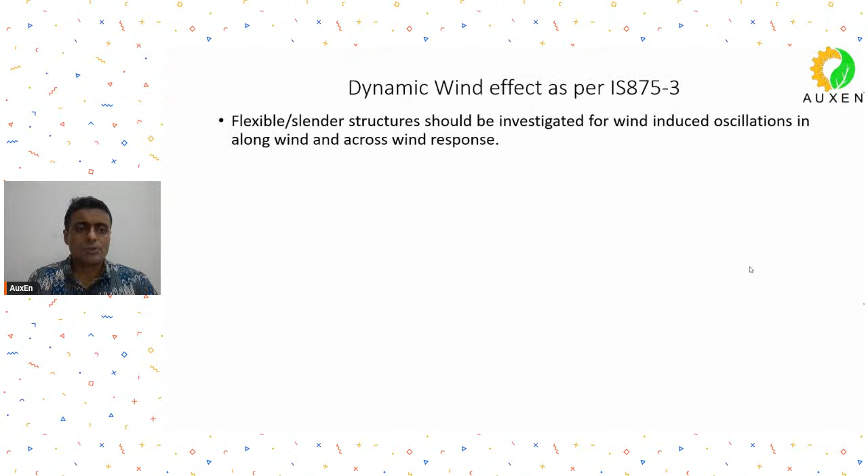So when are these dynamic wind effects to be considered? IS 875 part 3 tells us that if your building's height to minimum lateral dimension ratio is about 5 - it doesn't say exceeds, it says about 5, meaning even 4.5 or 4.3 or 4.6 qualifies - this is left to the discretion of the structural engineer to decide whether even a 4.5 ratio qualifies for dynamic wind effect calculation or not.

So if your height to minimum lateral dimension is about 5, or the fundamental mode of vibration is less than 1 hertz - meaning your time period will be more than 1 second - if either of these criteria is satisfied, then your building should be checked for dynamic wind effects. What are the dynamic wind effects we have to consider? Let us see.

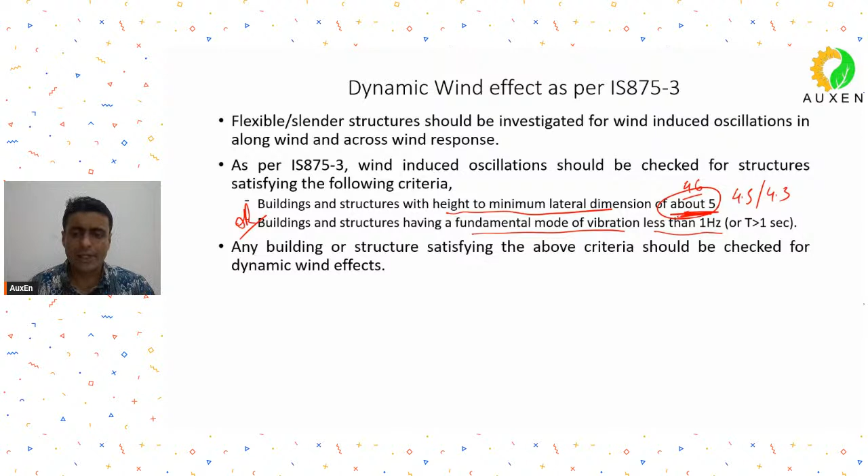I was asking who has used the dynamic wind effects in their projects. Mr. Mohammad Danish says he has used it in one of the RCC high-rise buildings he did. Anyone else in the audience who has used these dynamic wind effects? Mr. Partha has used it as per the British standard. Very nice, let us move ahead.

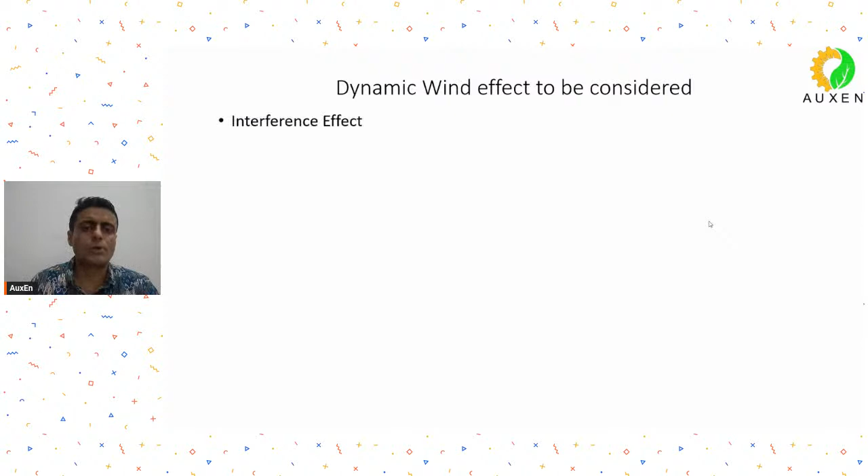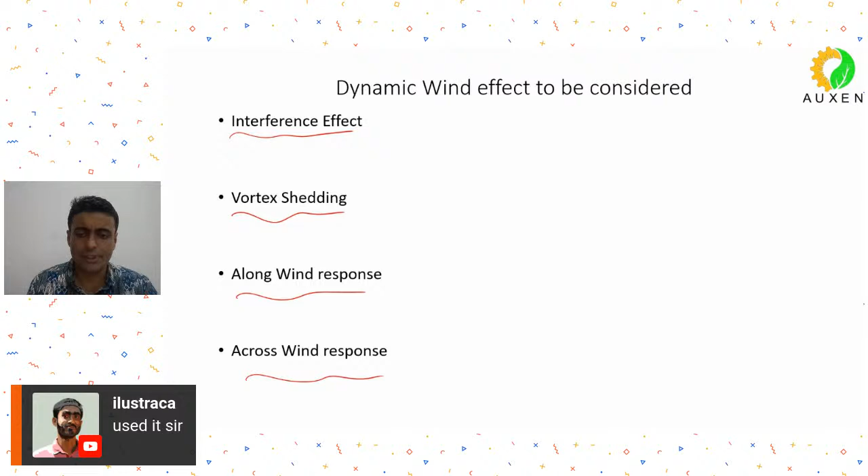The dynamic wind effects, according to the code, list out four types: first is the interference effect, vortex shedding, the along wind response, and the across wind response. One by one, let us see what these mean. Mr. Sandeep has also used it - I mentioned his name at the start of the episode because I saw some of his videos on YouTube for dynamic wind calculations, and the Excel sheet he shared was really helpful for understanding. So these are the four effects we should consider.

What is the interference effect? So the first effect that the code lists out, I think in section 8 of IS 875 part 3, is the interference effect. So what does it mean?

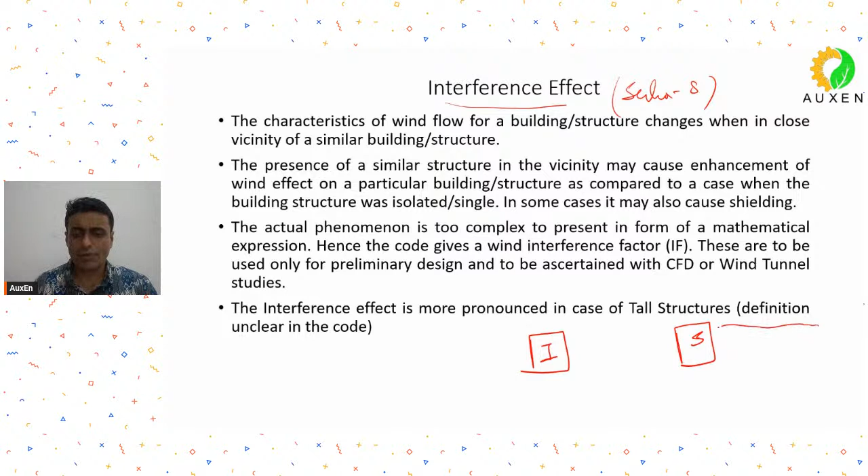Suppose this is your building. If this was an isolated building, the behavior of this building would have been different. But let us say there is a second building in the vicinity. Then if your wind currents are flowing and there is a second building in the vicinity, the effect of this other building may induce some additional responses on your primary structure.

To put it in other words, let's say you are going to construct a structure in the vicinity of a pre-existing structure. This is your new structure, this is your old structure. So what may happen is, because of the presence of the old structure, the wind currents may undergo some interference, and the wind forces that this new building will experience would be slightly different than what would have been if this building was an isolated standalone building. So this is what they are trying to tell you in this interference effect.

So the presence of a similar structure in the vicinity may cause an enhancement of wind effect on a particular building or structure as compared to the case when it was isolated or single. The actual phenomena is too complex to calculate, or it is too complex to have any numerical mathematical expression for it.

So therefore the code gives you an interference factor. You should use this factor only for preliminary design, and it should be ascertained with either a CFD analysis, computational fluid dynamic analysis, or wind tunnel testing to find the exact value of this interference effect.

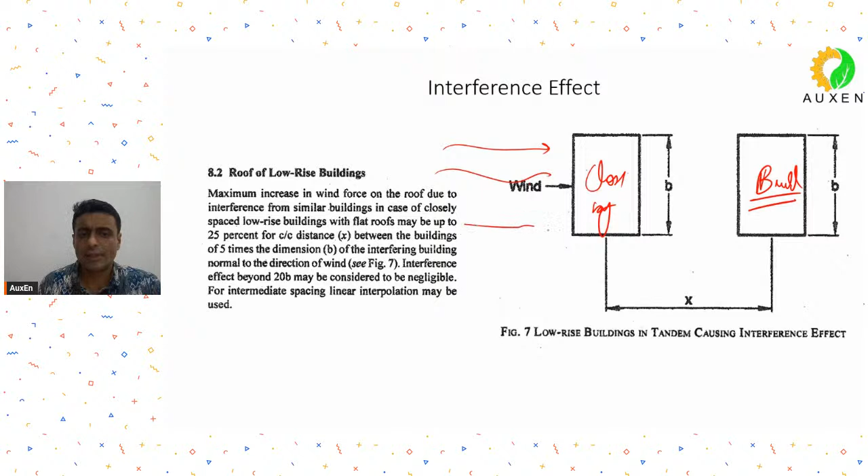So this is the codal provision. For low rise buildings, it says suppose this is your building under consideration, the building you are designing, and this is a close by building. So if the wind currents are blowing like this, and if there is an existing structure at a distance x, and x distance they write as 5 times b. So if there is a building at a distance of 5 times b or less, you have to increase the wind interference factor on this building.

That means if this building was isolated, as a standalone building, compared to that, for this building now which has another building close by, you need to increase the wind loads by a factor of 1.25. So this is what the code tells you for low rise structures.

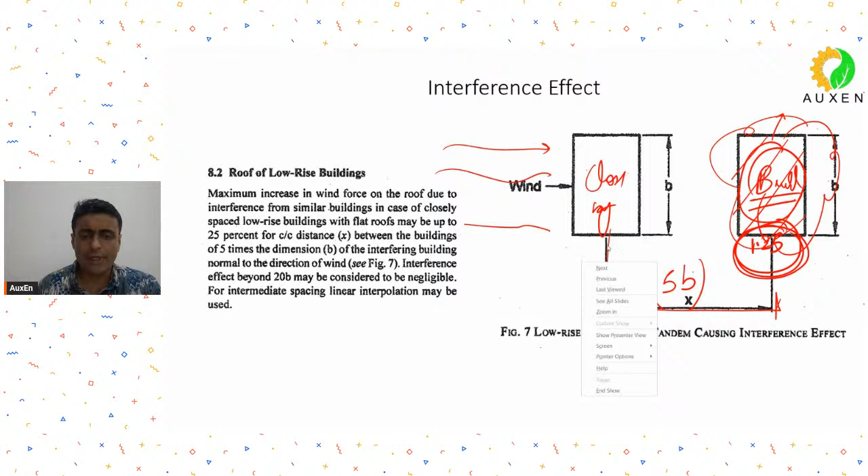If the nearby building was more than 20 times the width away, then you need not consider any interference effect. So that is what the code tells you.

Now there might be a question: let's say while constructing there was no building in the vicinity, but after construction a new building came up close to the existing building. Then even the wind currents on the existing building will undergo a change, isn't it? Suppose while constructing there was only this building and you did your wind load calculation as a standalone building, and after a few years a new building got constructed close by. Now the wind loads or wind currents on your building will undergo changes.

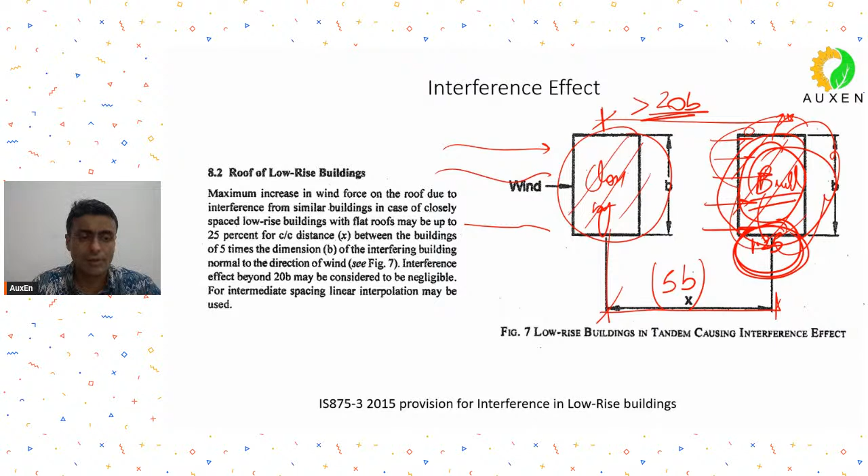So in such cases, you have to anticipate as a structural engineer the possibility of future constructions, and accordingly you will have to consider the wind loads and anticipate the possible interference.

Then you have got another criteria for tall buildings given in 8.3. Here it says if this is your building under consideration, and suppose there was an existing building in the vicinity, it has given you certain zones - you can see Z2, Z3, Z4 and so on. So if this building was, let us say, A, B, C and D, suppose you have a building in this zone, suppose you have this building B.

Okay, so what interference will it have on your original building O? For that you have to check this zone. This zone is Z1. So presence of this building B in zone Z1, you will have to consider an interference factor of 1.35 on your original building. That means you have to multiply your wind loads by a factor of 1.35. Is that clear?

Suppose your building was this building C. This is in zone Z2. So presence of this building C in zone Z2 will mean that on your original building, you will have to multiply the wind loads by a factor of 1.25. And likewise for other zones also. So this is how this interference zone diagram is given to you.

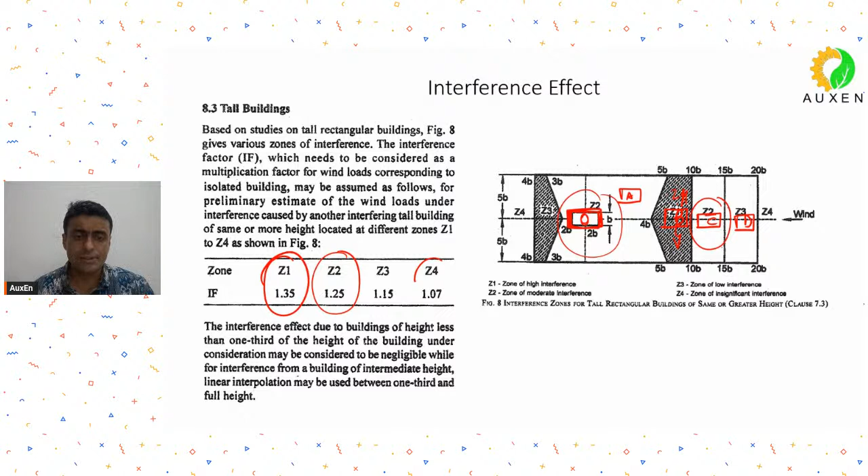When do you have to consider the interference of a nearby building? When its height is equal to the height of the original building, and up to one third of height of the original building. If the height of interfering building is less than one third of the original height, then you do not consider any interference effect. For intermediate heights, you can interpolate these interference factors. So this is how you have to consider the interference effects.

So this was the first dynamic effect given in IS 875 part 3. The next dynamic effect is vortex shedding. What happens in vortex shedding? Your wind currents, when they encounter a sharp, blunt object, disperse near the edges. When they disperse near the edges, alternating vortices are formed. Because of this vortex formation, even though the individual vortices are not large, since it is a vortex formation in an organized pattern, it leads to across wind force on your structure. So this also is a problem.

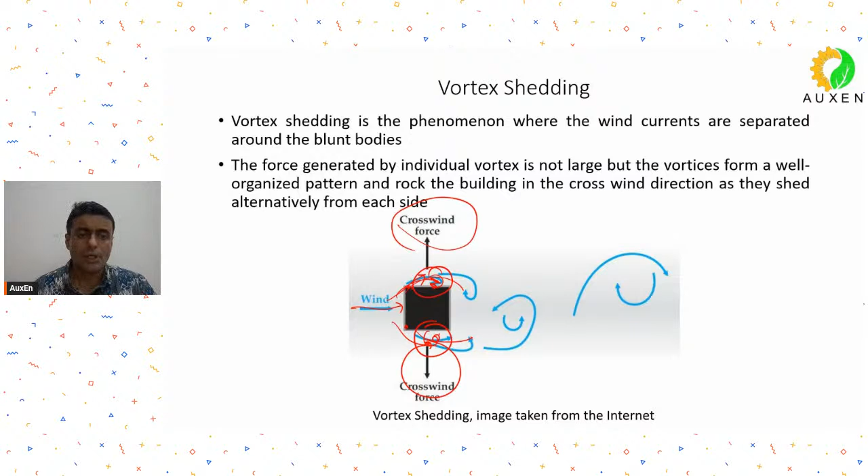Vortex shedding might be a problem for tall slender structures. What does your code tell you? That this is of special significance in tall structures, and it may lead to significant across wind responses. When will it lead to significant across wind responses? When the frequency of vortex shedding matches with the fundamental natural frequency of the structure. Then there will be a situation like resonance - it will be a resonant frequency, and that will lead to significant across wind motions. If such a thing happens, the code tells you to refer some specialist literature in such scenarios.

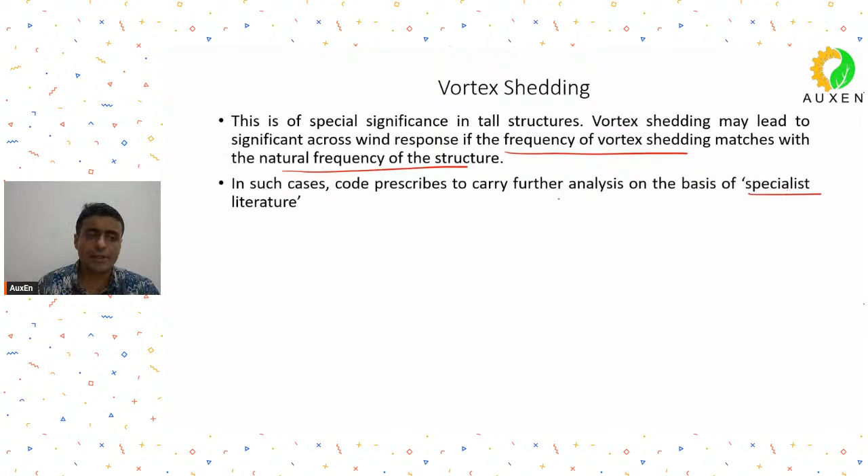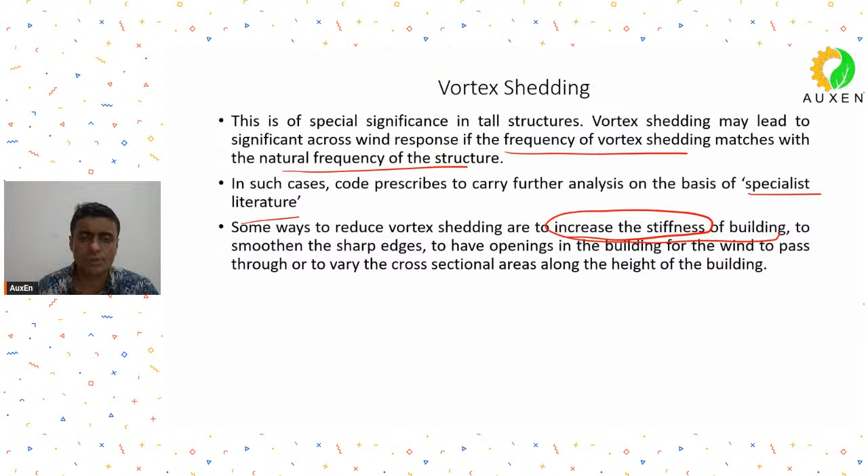This is true for very tall buildings. If your building is very tall, you adopt some strategies to reduce this vortex shedding. How do you do it? Either you increase the stiffness of the building, but increasing the stiffness is tricky because then it will attract more earthquake forces also. And for super tall buildings, you cannot go on increasing the stiffness beyond a point.

The other thing is that you can smoothen the sharp edges. So if your building plan is like this, perhaps you can make it smooth like this. Any building cross section that resembles this plan, where the edges have been smoothened out instead of providing sharp edges - can you recall any tall building where they have smoothened the sharp edges? If you have heard about Taipei 101 - in Taipei 101, the plan of the building initially was having sharp edges, but then to reduce the vortex shedding effects, they reconfigured the plan and smoothened the corners, with concave edges like this. So this is one of the strategies to smoothen the sharp edges.

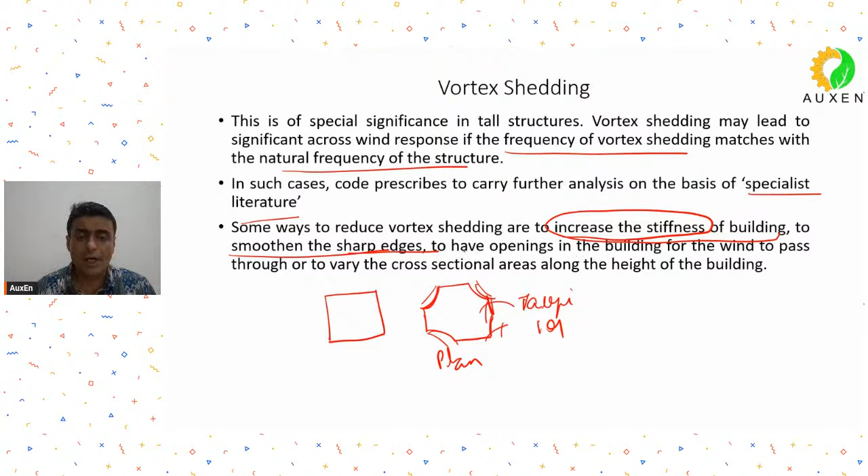The other strategy can be to have large openings in the elevation. So instead of having a straight elevation like this, you may introduce an opening like this in the elevation itself. I think there are some buildings in China, Shanghai, or Dubai, where they have introduced large openings in the elevation of the building to reduce the vortex shedding.

The third strategy can be to vary the cross sectional area of your building. So along the height, you don't have a uniform cross sectional area throughout. You try to introduce or vary the cross sectional areas in elevation, so as you move up, you will see different cross sectional areas at different heights.

So where do you see such a strategy being used? Having different cross-sectional areas along the height of the structure. If you've heard of Sears Tower in Chicago, it uses this strategy, or Burj Khalifa uses this strategy. Both of them have varying cross-sectional areas along the height. So these are some of the few strategies you can reuse in super tall structures if you want to reduce the vortex shedding.

What does the code tell us? The code tells us that you calculate the frequency of vortex shedding. This is the formula, and if it matches with the fundamental structural frequency, then your structure has a tendency to undergo vortex shedding, and it may then be properly analyzed with the help of specialist literature.

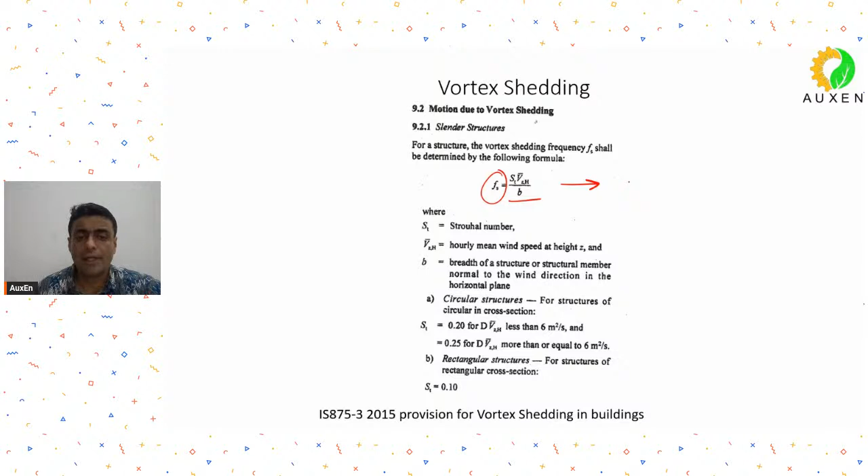So how do we find out this value? Let us see. Here they give a formula to calculate the frequency. Let me take a quick example: say your building has a plan of 18 meters by 27 meters, and this is the wind direction. So your B is 18.

ST is called the Strouhal number. I don't know whether this pronunciation is correct, but just like you have Reynolds number in fluid dynamics, similarly this person has done a lot of work in the field of wind and fluid in general, so it's a number named after him. For general structures, you can take this value as 0.1.

Let's say the hourly mean wind speed at height - I'm just taking a random value - let's say it was 40 meters per second. This is after the introduction of K1, K2, K3, everything. And the width is 18.

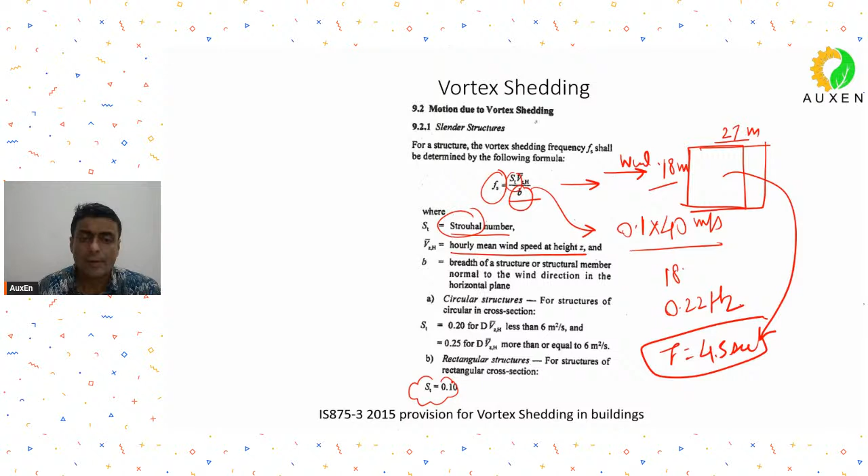So what frequency do you get? If someone can calculate - the frequency you get is 0.22 hertz. So what is the time period? The time period will be 4.5 seconds. That means if this structure under consideration has a time period of 4.5 seconds, then such a structure will undergo vortex shedding, or you may say vortex shedding then becomes an important criterion to consider.

Are you getting this? So generally you'll see that normal height buildings will not have this kind of time period. Your normal G plus 15, G plus 20, even G plus 25 structures will not have this kind of time period. This type of time period will be there for, let's say, G plus 30, 35, 40 onwards. Otherwise you won't get this kind of time period for your general buildings. So what I'm trying to tell you is that for general height structures, vortex shedding is not a problem, so you may not be very worried about it.

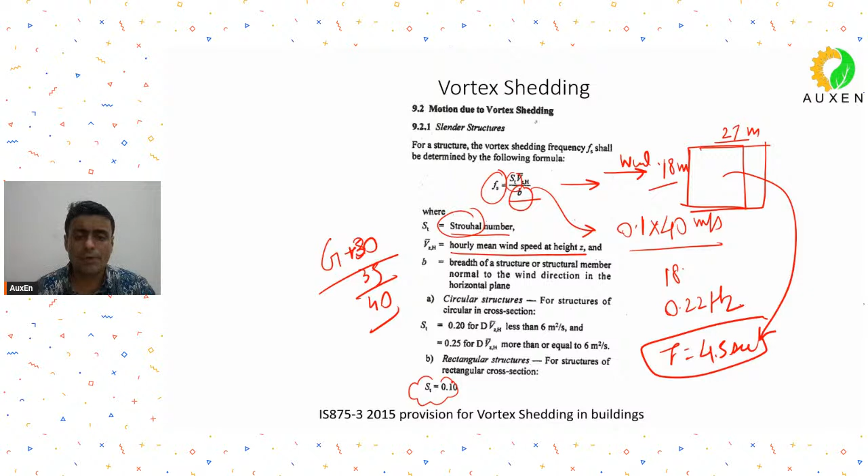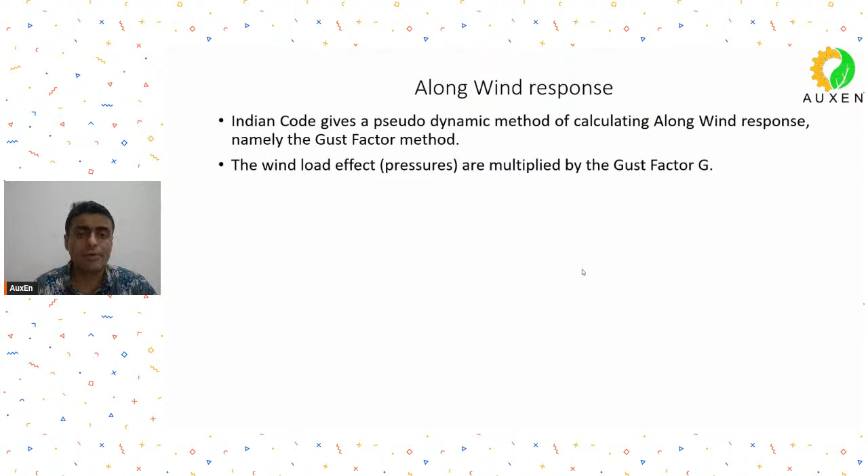So this was the second dynamic effect. The third is the along wind response. Along wind response means - this is the plan of the building, and wind is hitting from this direction. So the dynamic amplification of wind loads in this direction is called the along wind response.

So how do we calculate it? We calculate it by a method called the gust factor method. It is basically a pseudo-dynamic method because we do not calculate the wind forces on the basis of the modal behavior of the structure. We just do it on the basis of a factor, and we multiply that factor by the static wind to get the dynamic wind effect. So basically we take the dynamic wind equal to G times the static wind. It is similar to the equivalent static method, where we are not doing the actual modal analysis, we are just enhancing the value by a factor. We have a static wind, we multiply it by the gust factor to get the dynamic wind response, so therefore we call it the pseudo dynamic method.

This method, or this type of mathematical expression, was first given by a person called Davenport in the year 1967.

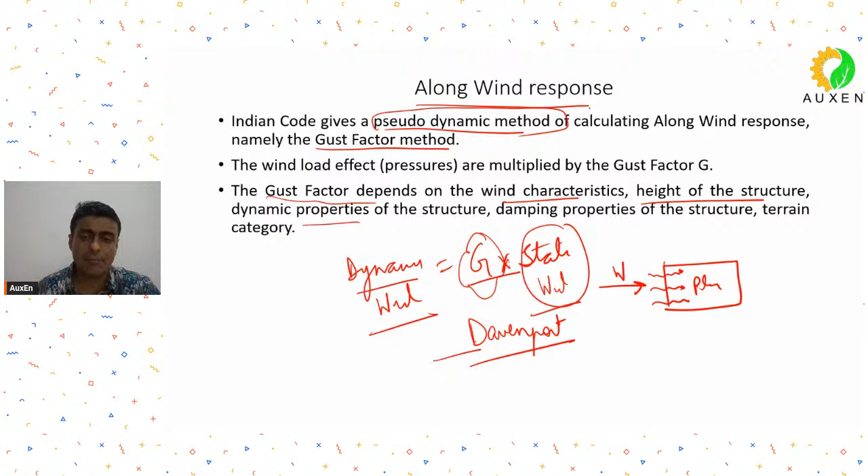I don't recall his first name, but he did a lot of work in wind engineering, and it is his method that all international codes today use as the gust factor method. The gust factor depends on wind characteristics, height of the structure, dynamic properties, time period, damping, terrain category, etc. There's a long calculation procedure given in the code, so I've taken screenshots of the code itself.

Here this is phi, not G. There's an amendment to this clause. Sorry, it is phi over here, and this is given as the gust factor. Out of this, one term is the base component of your wind currents, and this is the variable component. So you take both into account to calculate this gust factor.

There are a lot of calculations given to you. It is a step by step algorithmic approach that you have to follow, and you get this gust factor. Once you get it, you multiply the wind pressure by the wind coefficient CF, given in table number 21 of IS 875 part 3. Just like you have the external and internal pressure coefficients CP, CPI, you have these force coefficients for rectangular buildings, given in table 21 if I remember correctly. So it's this coefficient into area into pressure.

So this is the static wind speed. You multiply it by G to get the dynamic wind effect. Then you can get the overturning moments at the base, or the total deflection at the top. All those values you can get once you have these dynamic forces.

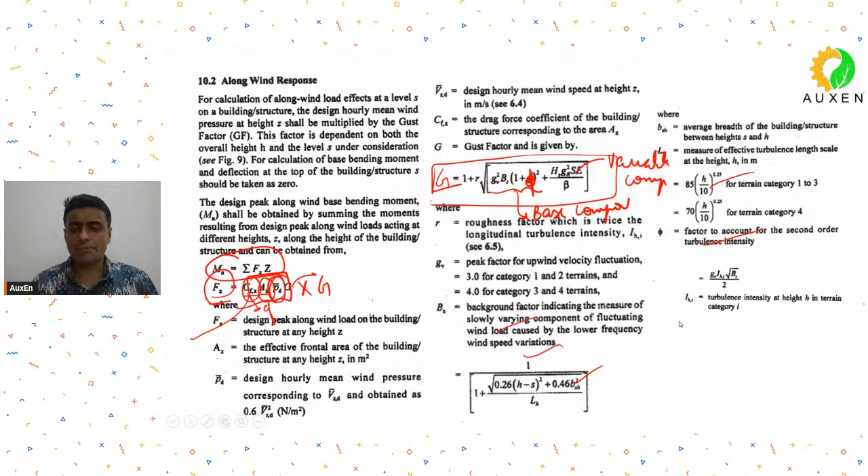So the gust factor is calculated, and there are a lot of formulae. It's formula intensive work, so it is better to prepare some Excel sheet to automate this calculation, because you can't calculate this every time manually. The formula goes on, and you calculate the gust factor.

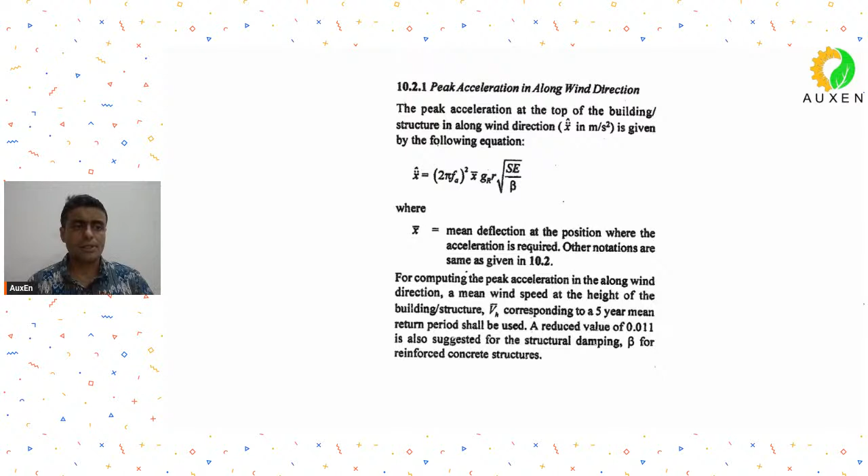Then you can also calculate the peak acceleration, which is generally required for human comfort, so sometimes you may need to calculate it. All these things can be easily done. The fourth response is the across wind response - that means wind is blowing in one direction, but the response happens in the perpendicular direction.

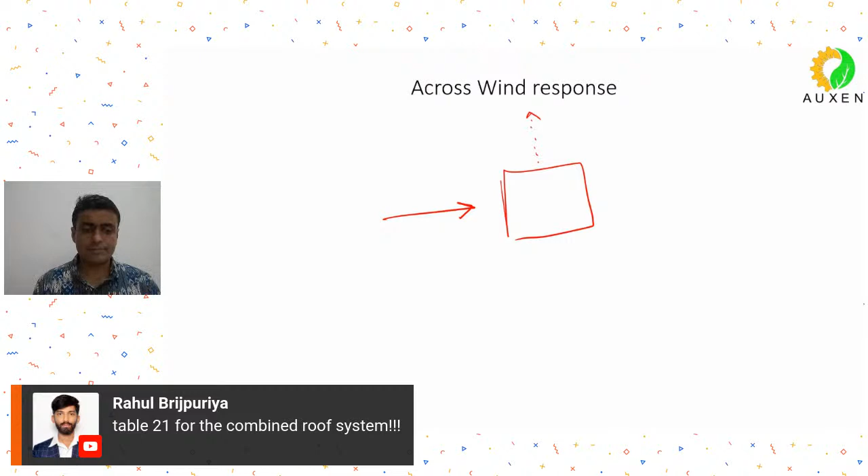Mr. Rahul is saying table 21 is for the combined roof system. Oh no, wait, which is the table for rectangular buildings? Let me search. CF table... ah, this is figure 4, not a table - figure 4, page 35. Okay, yeah, that is the one.

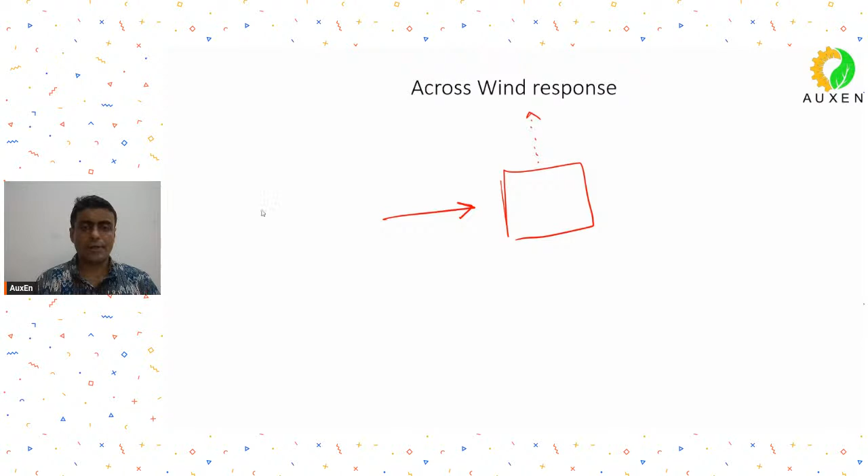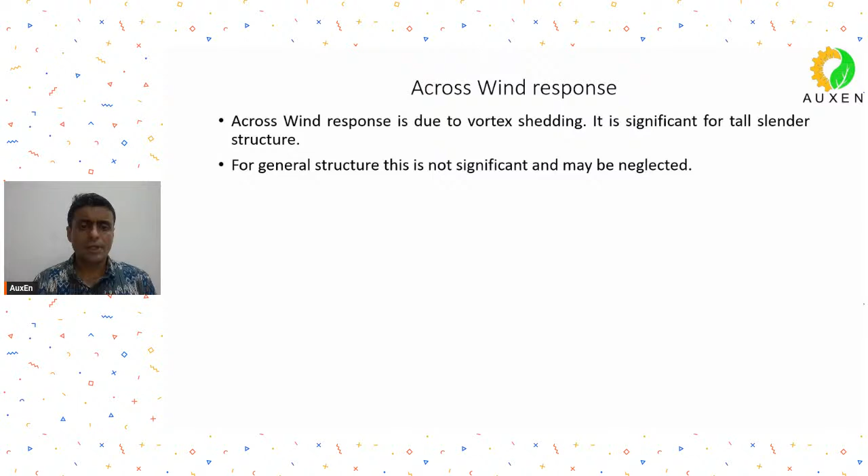So across wind response - your code tells you that across wind response due to vortex shedding is significant for tall, slender structures. For general structures, that means if it's not a tall structure but a mid-height structure, you may ignore it because it is not significant. The calculation for across wind response is given in code section 10.3.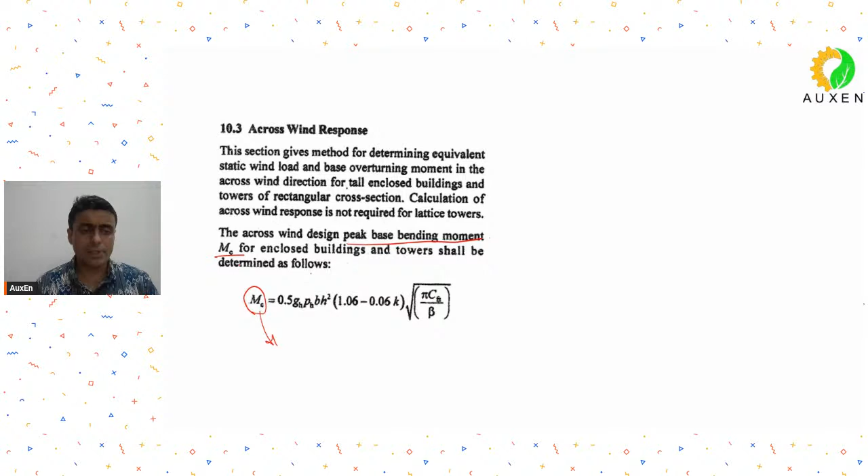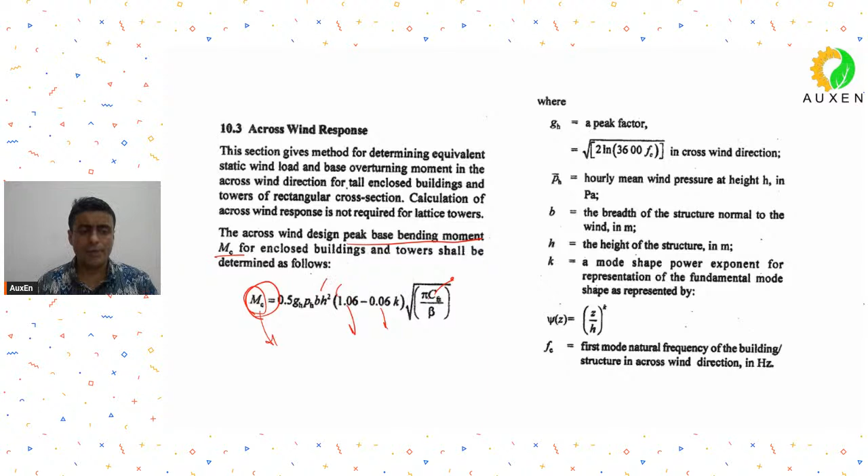In this case, it is a slightly different approach. First, you calculate the peak base bending moment - just like the total overturning moment in case of earthquake. You calculate this first. Once you have this value, all these independent terms are given in the code for how to calculate them. Once you have the overturning moment at the base, you can calculate the distribution of these forces at every level.

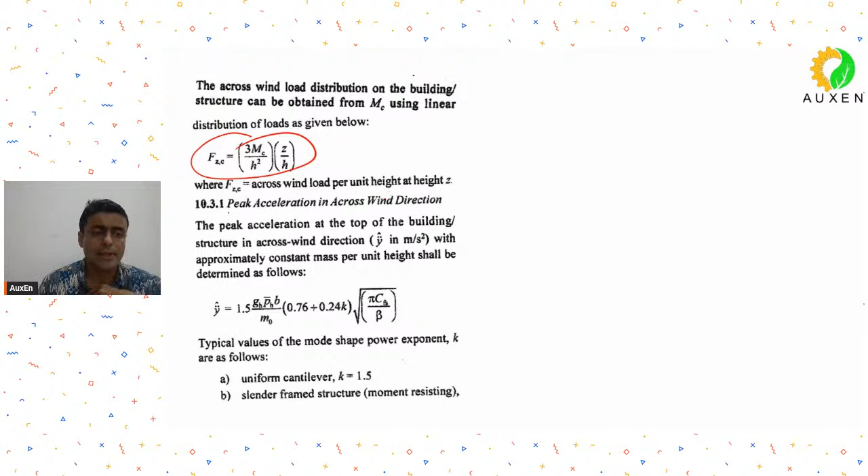So this is a slightly different way of calculating for the across wind response, and you can also work out the peak acceleration if you want. There is one term, CFS, that you see here, which you can calculate using the curves in figures 10 and 11. These figures give you the way to find out this CFS. So this is how you do the dynamic calculations.

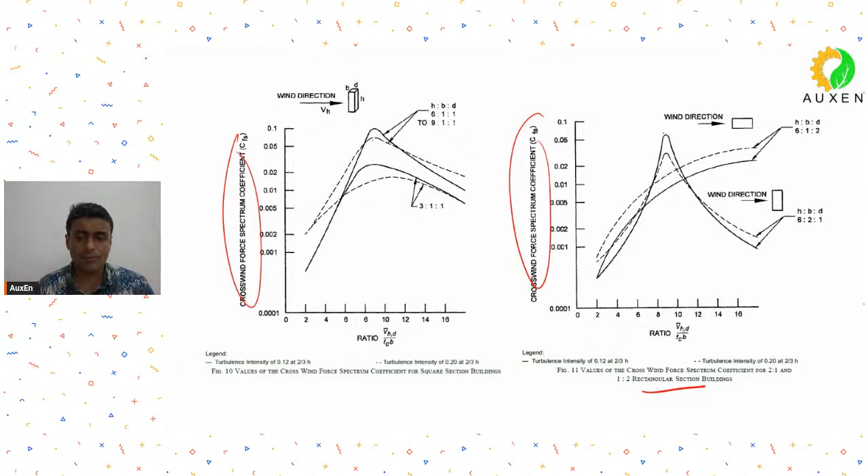Now what I have done is I wanted to discuss this using a sample model. Mr. Sandeep is asking how we can use this method when the structure is not rectangular or square, since the charts for CF are only given for such shapes. Yeah, correct - the CF charts are only given for square and rectangular structures, and even for rectangular ones, only for an aspect ratio of 1:2 or 2:1.

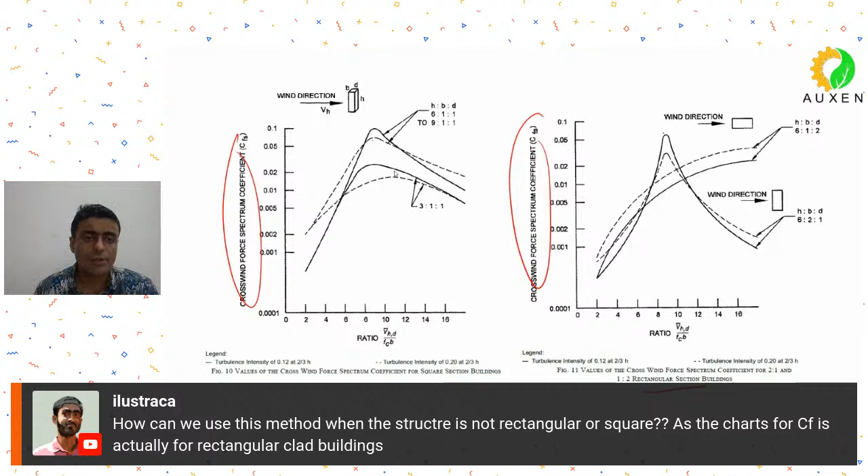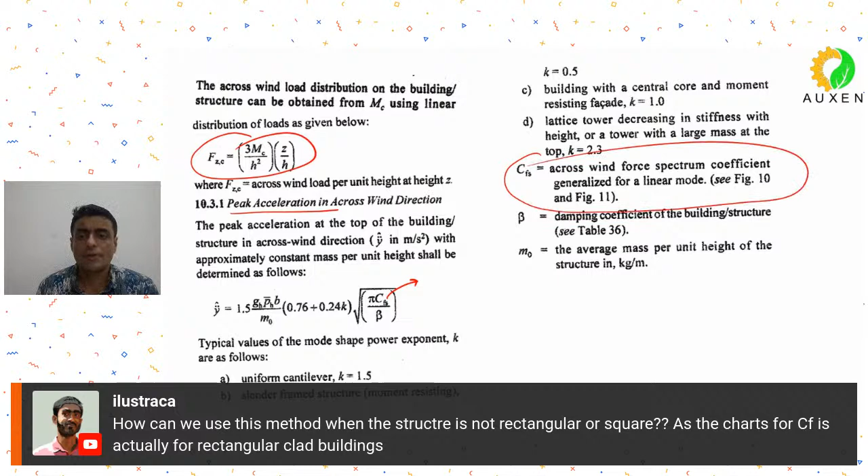So for any other randomly shaped structure, you don't have the methods and ways to calculate CFS. I don't know - you may have to go for some wind tunnel testing, or I'm not quite sure how you do it, because the code doesn't tell you anything about it. It just says CFS is the across wind force spectrum coefficient. So for a non-rectangular, non-square building, what do you do?

Mr. Sandeep is asking, do we need to assume the structure as equivalent to a rectangle? No, because the behavior entirely changes in case of wind. Suppose your structure was triangular in plan, and you assume some equivalent square. Then the behavior of this square will be totally different from that of the triangle. So I won't suggest assuming some equivalent squares or rectangles.

I would suggest you go for some wind tunnel testing or do some CFD testing - CFD analysis, computational fluid dynamic analysis.

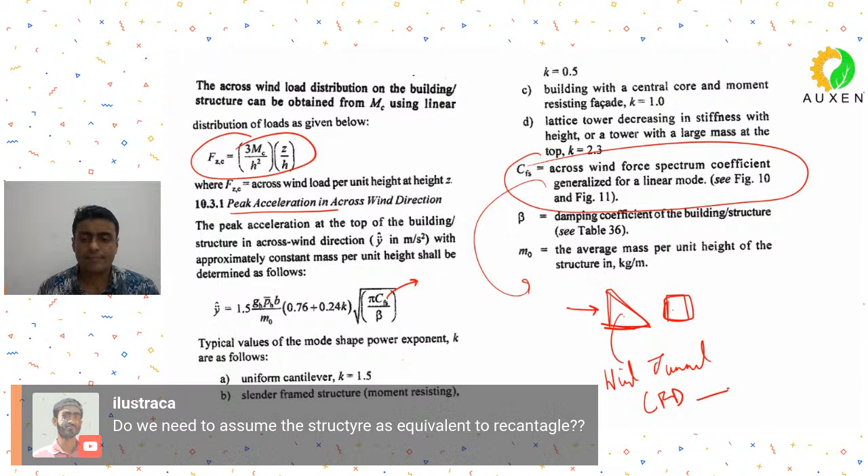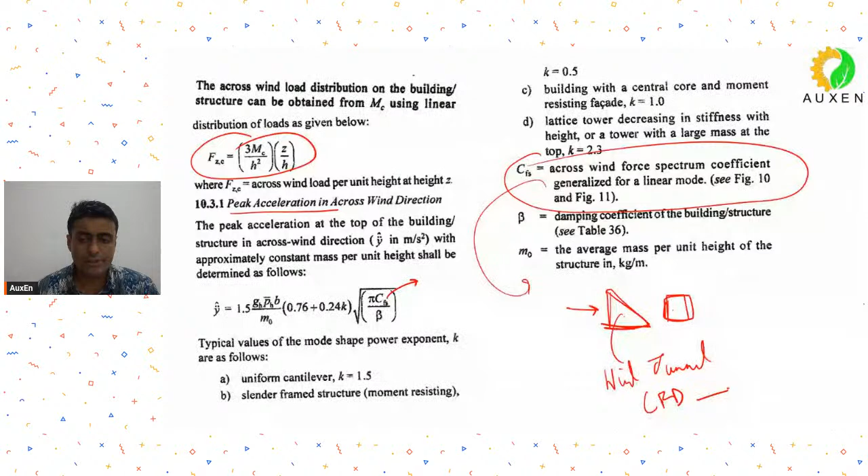So what we will do is quickly understand this in a better way. I'll share my screen. We will quickly see an ETABS model, and then try to understand what would happen if I had to calculate the dynamic wind effects for it.

Now, to understand how the dynamic wind effects will be calculated, I will mainly focus on the along wind and across wind responses, because interference we cannot predict. The code tells you to take only a preliminary value for interference. If there are other structures in the vicinity, the code always recommends you go for a CFD or wind tunnel testing. So I am not doing interference. Vortex shedding we can probably do, and we can do the along wind and across wind.

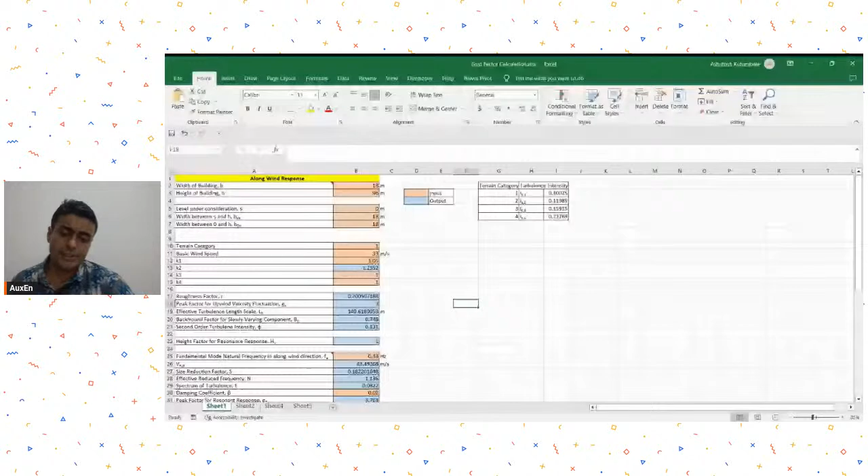Let me share - how do I share? Let me take you to our Excel sheet. In making this Excel sheet, I had asked for some help from Mr. Sandeep Dev. So this is the Excel sheet that we have tried to make - it will calculate the along wind response, and it will also calculate the across wind response.

So you have to input the height and width of the building. Right now this is my building - this is 18, this is 27, and I am considering wind in this direction, so this will become the width. So width of the building is 18, height is 96 meters. We are doing a very quick calculation just to see what sort of values we get.

This is the level under consideration - S equal to 0, because I want to take the overturning moments and tip deflection, so I will have to put the value of S as 0. Then width is this. Terrain category - let's say we are in a city center, highly densely constructed, so terrain category is 4. Let us say we are somewhere in Bangalore or Hyderabad, so basic wind speed is I think 33 over there, so let us take that.

K1 is 1.05. K2 will be calculated as per height of 96 meters, so K2 is self-calculated. This roughness factor is 2 times the turbulence intensity, which is given over here - given in section 6.5 of IS 875 part 3. This is the peak factor for upwind velocity fluctuation, GV. All these terms are properly defined in the code along with the response, so I'm not going over that.

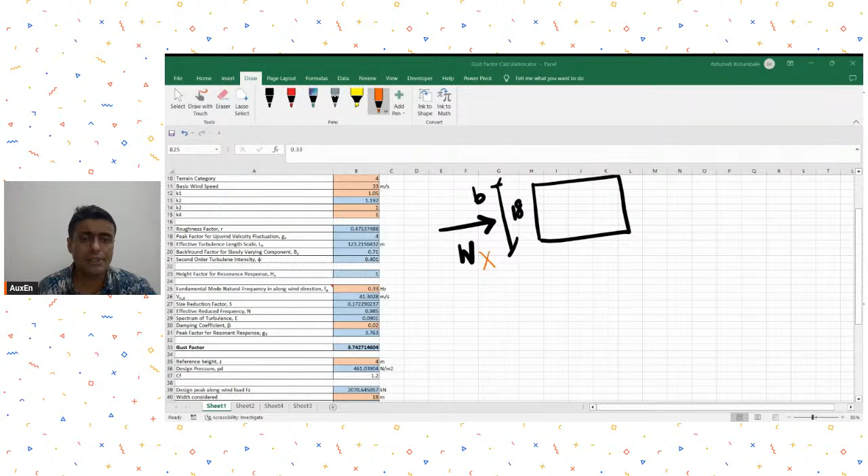You have to put the fundamental natural frequency in the along wind direction, meaning in this case I will have to put the frequency in the X direction. So I will go to ETABS and check the modal frequency. In this case, though I'm not sharing the screen, the modal frequency comes out to be - how much is it coming? - 3.27... it comes out to be 3.17 seconds. So the fundamental mode time period is 3.17 seconds, and I will put that value.

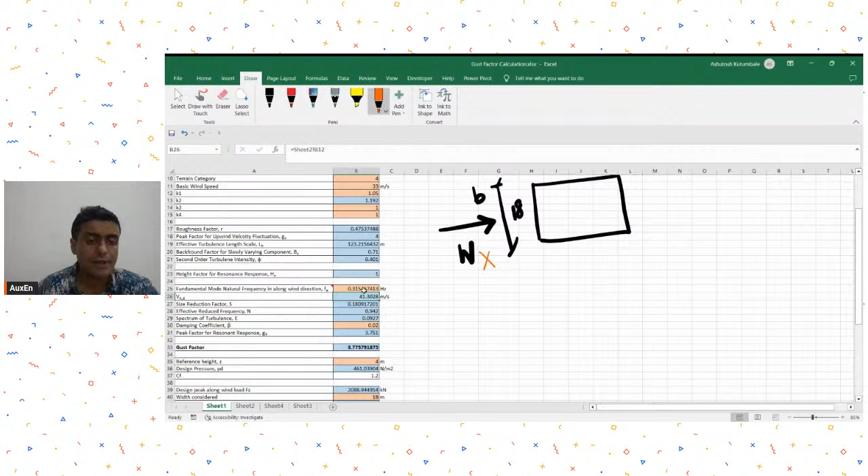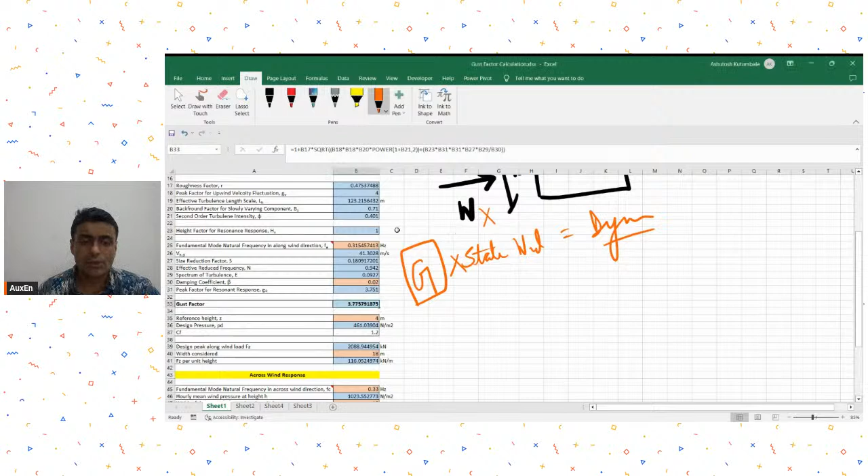So time period comes out to be 3.17 seconds, frequency will be 1 upon that, so I put that value. Then accordingly it calculates, and the gust factor comes out to 3.77. What does this gust factor of 3.77 mean? That all the static wind responses that we had calculated need to be multiplied by this gust factor - so our wind in dynamic is getting amplified by 3.77 times. Is this clear? I think it is clear. So this is how this gust factor calculation has to be done.

Now suppose at some reference height you wanted to calculate what is the total UDL acting at a particular floor level.

You can put this reference height and the CF factor from figure 4 as we had just seen. From figure 4, you put this CF factor and it gives you the wind load per unit height at a particular reference level. So at 4 meters, this is 116 kilonewton per meter wind force. To convert it into a force value, I multiply by half of the floor distance above and half of the floor distance below. Right now our floor to floor heights are 4 meters, so I multiply by 4 meters to get a value in kilonewton units. This will be the total wind load acting at a particular floor level. So in this way you can use this Excel sheet to calculate the wind loads at different floor levels.

Mr. Aakash is asking, have you applied stiffness modifiers for this model? No, not as of now. I have not used the provisions of IS 16700 for this case at least. You may ask then why still the time period is coming out to be 3.17. Because the columns were very far spaced, therefore the system is becoming quite flexible right now.

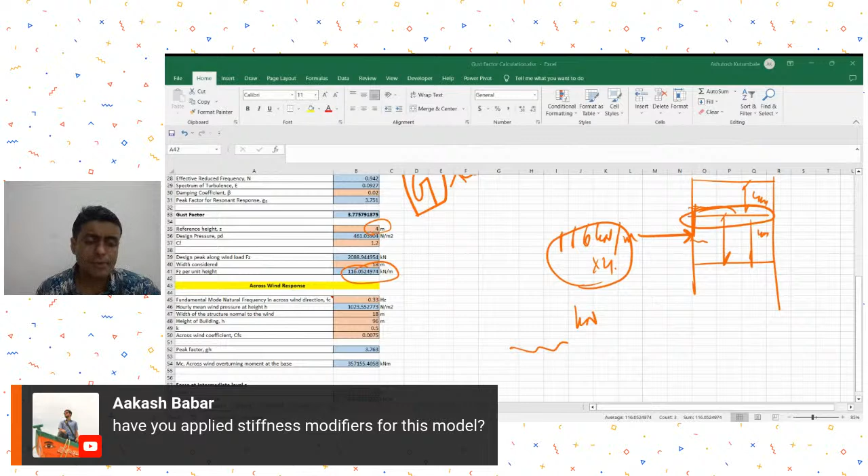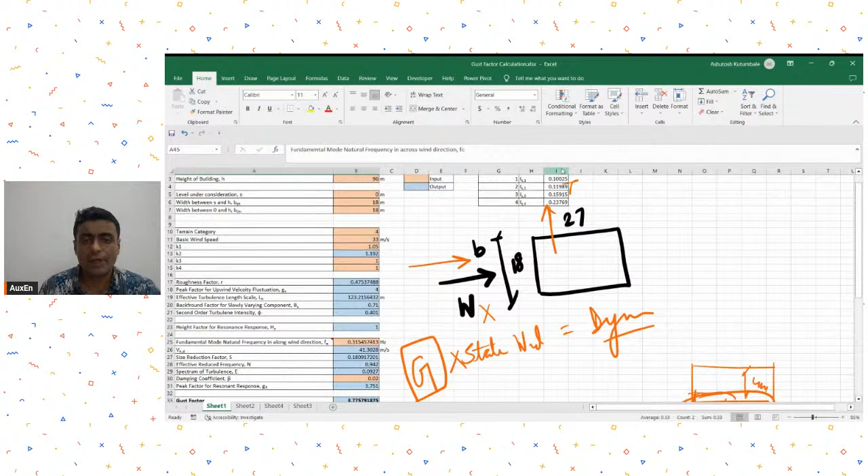So this is how the along wind response has to be calculated, and similarly you can calculate the across wind response. In this case, you have to first put in the time period in the perpendicular direction. If I was considering the response in wind in this direction, I will have to put the time period in the perpendicular direction and 1 upon it because I want to calculate the frequency. In the other direction, the time period was 2.95. In the y direction it was 2.95, in the x direction it is 3.17. So you can get the across wind responses also.

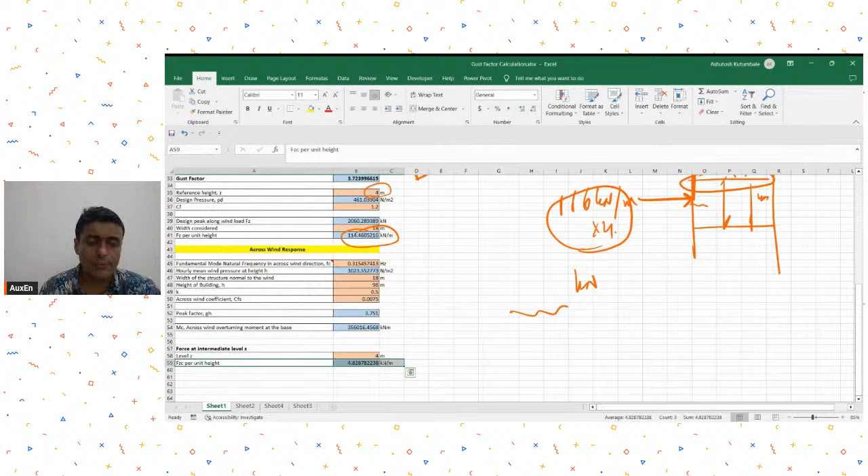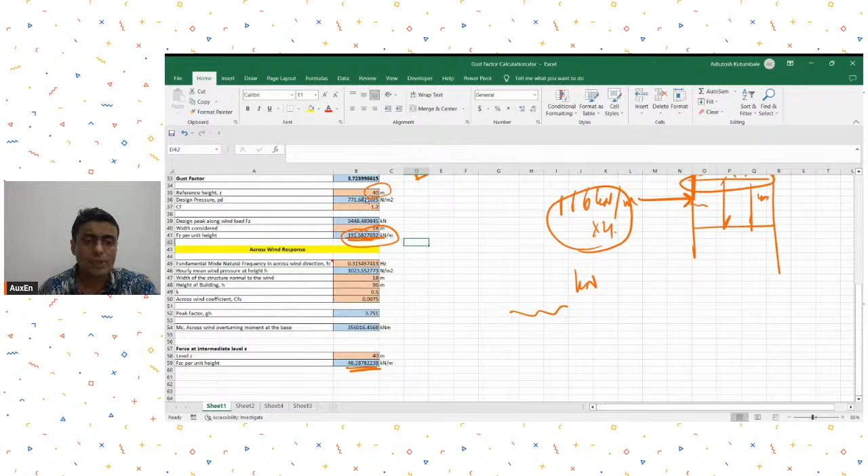For a reference level Z, you can calculate the across wind responses. Initially you will see that at lower heights, the across wind response was 4.82. Compare it with the along wind response, which was 114. But as you increase the reference level height, suppose at 40 meters, you will see a substantial increase in the across wind response also. At reference height of 40 meters, the along wind response is 191 kilonewton per meter, across wind response is 48, so now it has started becoming substantial. Suppose I was at 72 meter reference height, my total structure height is 96, this is the reference height, so it has started becoming substantial. For tall structures, across wind response is substantial; otherwise for shorter structures you may ignore the across wind response.

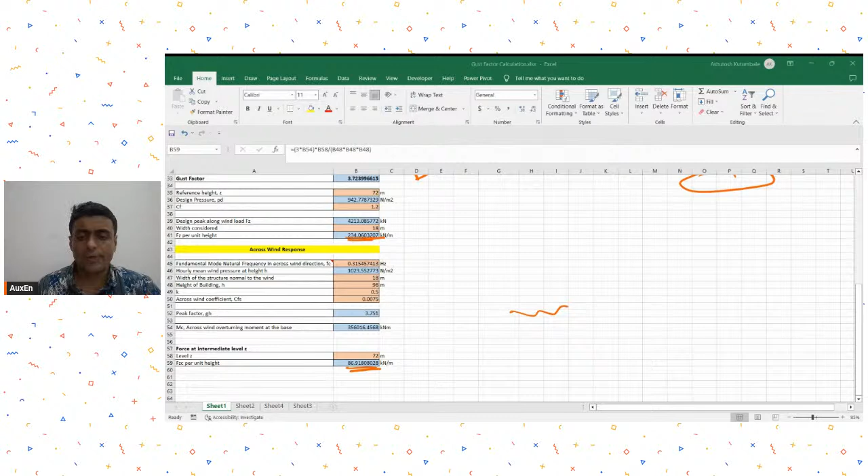Good, so this is what I had to tell you about the dynamic wind effects and their calculations for taller structures as per IS 875 part 3. Now if you have any questions we may take them, or otherwise I will go to the second segment where I want to discuss a few things about the deck slabs. Any questions, or should I move ahead?

So then I move ahead and take another discussion point. The next topic for today's discussion is about deck slabs, the use of deck slabs as a flooring system in steel structures. Now generally in steel buildings, what is the flooring that we use?

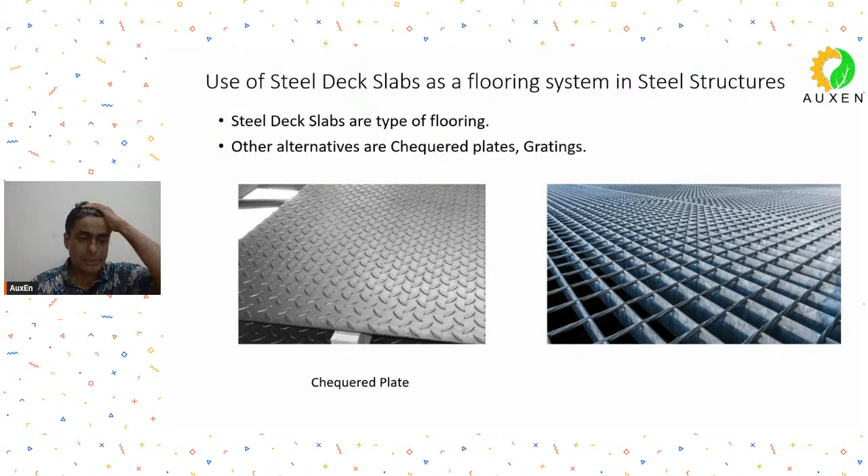So either we use checkered plates or we use gratings. I think you must have seen these two commonly used floor systems. There is a third floor system also that we may use in steel structures, and that is the deck slab with concrete topping. It is nothing but a steel plate - you can see a corrugated, embossed steel deck plate. It is resting on your steel beam. These are shear studs to connect this deck sheet with your I-section, and then you put concrete on top of this deck sheet with a minimum reinforcement. So this is called a deck sheet flooring system. How many of you have used this type of deck sheet flooring system in any of your projects?

Has anyone used deck sheets in their deck sheet flooring in their projects? Hello.

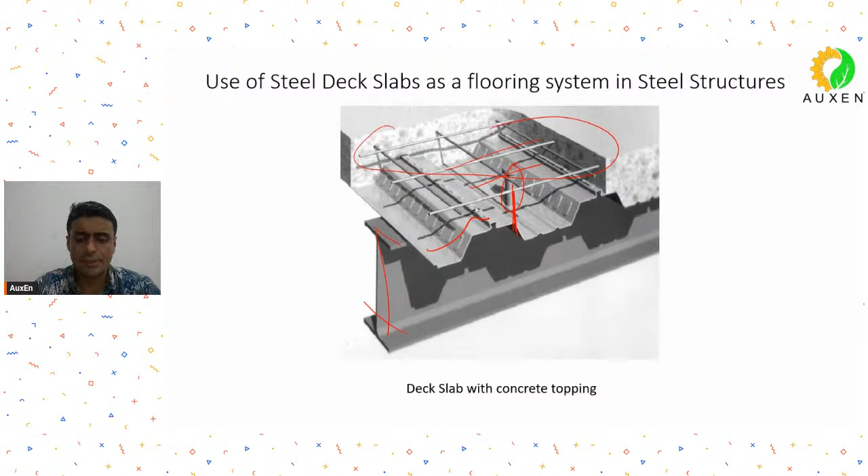Okay, so if you have not used it, it's an easy thing. I think it's easy to use deck sheets. So we'll just quickly discuss.

Steel deck sheets are nothing but steel sheets cold formed into corrugated profile sheets, typically 0.8 mm to 1.2 mm thickness. The advantage of using a steel deck slab is that you may use the steel deck sheet as shuttering during the construction stage, so you don't have to use props and centering and all those things.

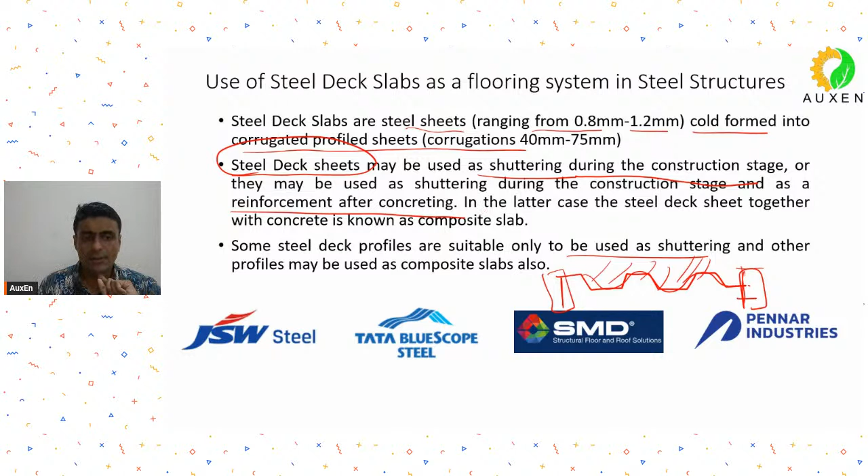Initially it acts as shuttering, you need not put any props, you just ensure that it is resting on beams. Once you do the concreting, then it starts acting as reinforcement also in the post-construction stage. If it acts as reinforcement in the post-construction stage, then it is called a composite slab.

Some steel deck profiles you may use only as shuttering, some other steel deck profiles you may use as shuttering plus composite slabs both. It depends on the profile of your deck sheet. There are different manufacturers that make these deck sheets, some of them I have named over here. These are the typical profiles that you get in deck sheet.

You can see the profile, there are corrugations, there are embossments, these are the ribs that you create, these are the depths. This is a 46 mm depth, these are the corrugation widths and all these things. This is a larger depth, 51 mm depth, this one is having a 60 mm depth, and this one an 80 mm depth.

Different profiles are used for different purposes. This type of profile is only used as shuttering, this is used for shuttering plus composite slab, and these others also as shuttering plus composite slab. The first profile is only used as shuttering, else the other three can be used for composite action as well. These images are from one particular manufacturer, but almost all manufacturers make similar specification deck sheets.

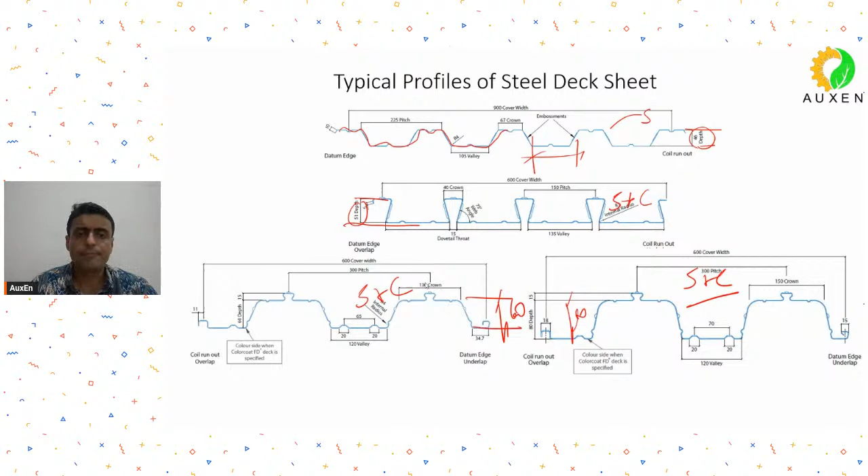So what are the challenges in design? The challenges in design are that in the construction stage it is easy, because it acts as shuttering. So you have to check the thickness of the deck sheet, and the bending moment carrying capacity of this deck sheet alone, for bending, flexure, and shear requirements. You also have to check the deflection of this independent deck sheet without concrete under construction loads, and check its fire resistance.

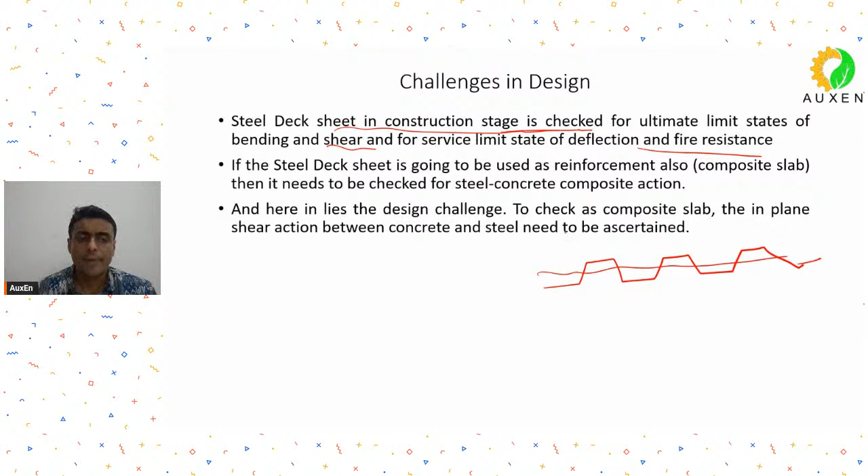So this part is easy. The difficulty is when you are going to use this deck sheet in composite action, that means after you put concrete, it is also going to act as reinforcement. Then there is a challenge, because now you need to check this for composite behavior.

Let's say I am showing an elevation. This was my concrete and this is my steel deck sheet. For these to perform together, when they undergo bending, the in-plane shear that is generated, the longitudinal shear, your deck sheet and concrete bond should be able to take that longitudinal shear. If it is not able to take this longitudinal shear, then slippage happens between the concrete and steel deck, and if slippage happens, it does not act as composite behavior.

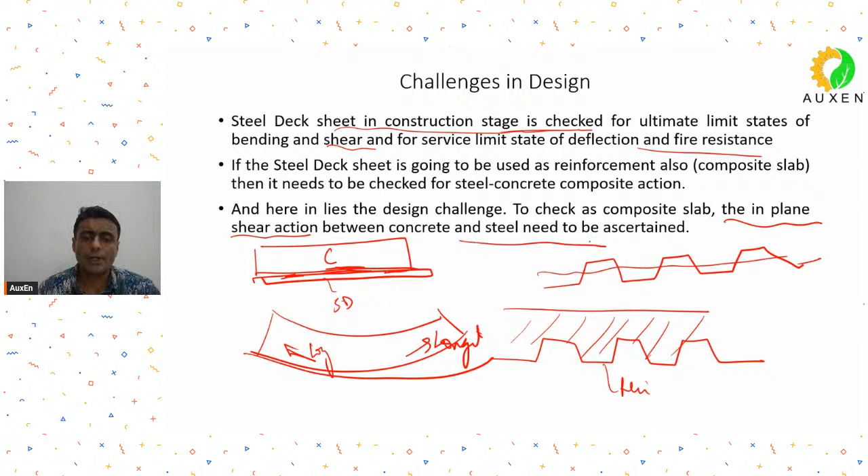So the longitudinal shear, or the in-plane shear action between concrete and steel, needs to be ascertained, and that is the biggest challenge in the design of deck sheets. Suppose this part is concrete, this part is steel deck. If it behaves as composite, it will behave like this, correct? But if it is not behaving as composite, it will have its individual neutral axis, and they don't behave as a unit, so your composite action is lost.

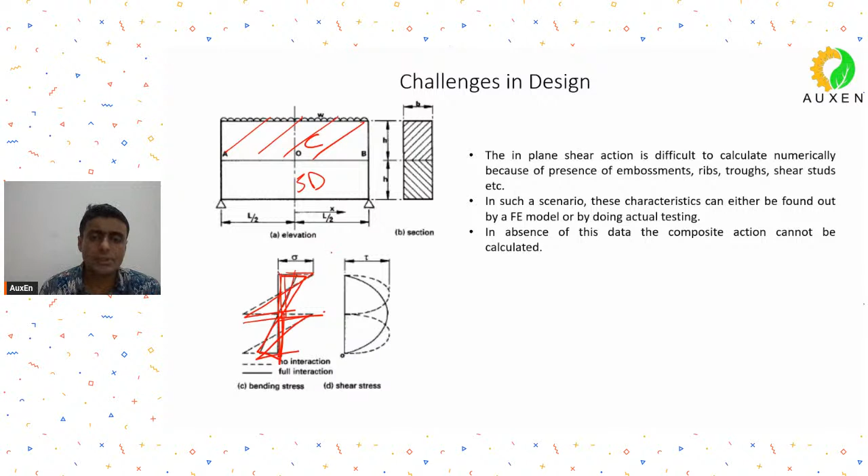The calculation for this in-plane shear action, in order to ascertain whether this is behaving as a composite or not, is numerically quite challenging. You are not able to do it by a numerical formula because a deck sheet has crests and troughs which add to the bond between concrete and steel. It has embossments, ribs, shear studs. There are a lot of elements which make it difficult for the numerical calculation.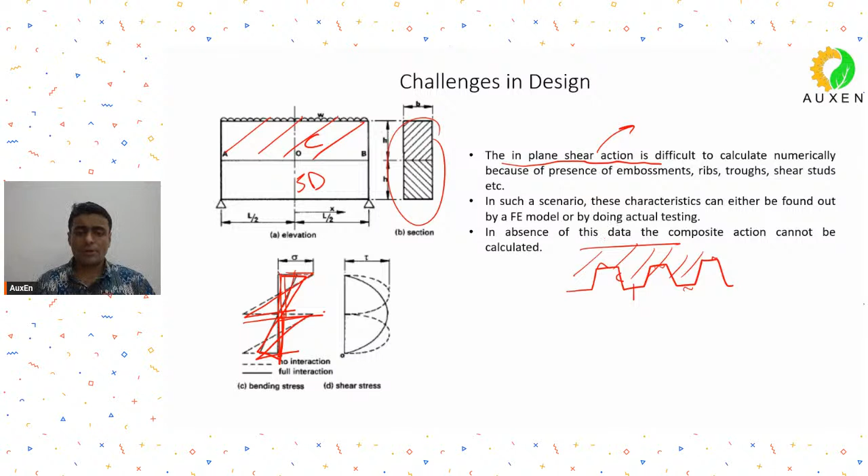So therefore, either you do some actual testing, you do a push test to ascertain the in-plane shear characteristics, or you try to do an FE modeling. These days, using softwares like ANSYS or Abaqus, you can do this type of FE modeling also.

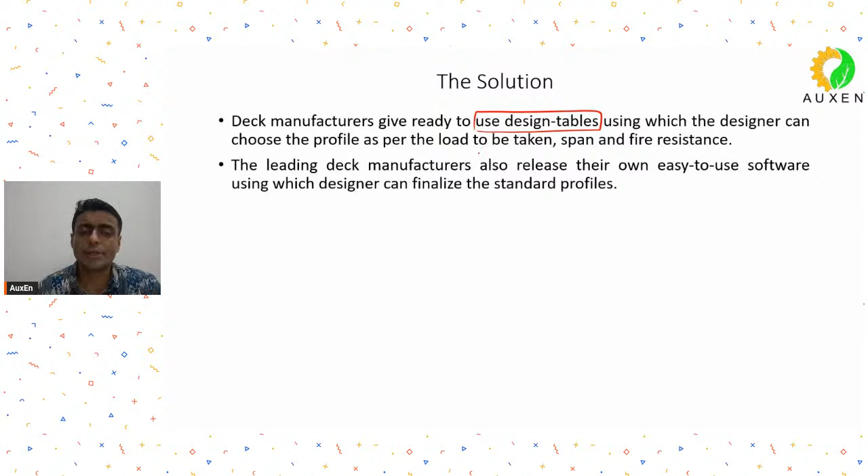But generally, for practicing engineers, there is an absence of this data, so we are unable to calculate this composite action. So what is the solution? The deck sheet manufacturers either give some ready to use design tables, so as a designer you just have to refer that table and choose the profile as per the load, as per the span, and as per the fire resistance. Or some of the leading deck manufacturers have also developed their own small software which you can use as a designer to finalize the standard profiles.

Anyone who has used these types of tables or profiles or these softwares to finalize the deck sheets? Anyone? No one. Very good.

So I'll just show you a sample of this easy to use software, and I will also show you a sample of this type of table.

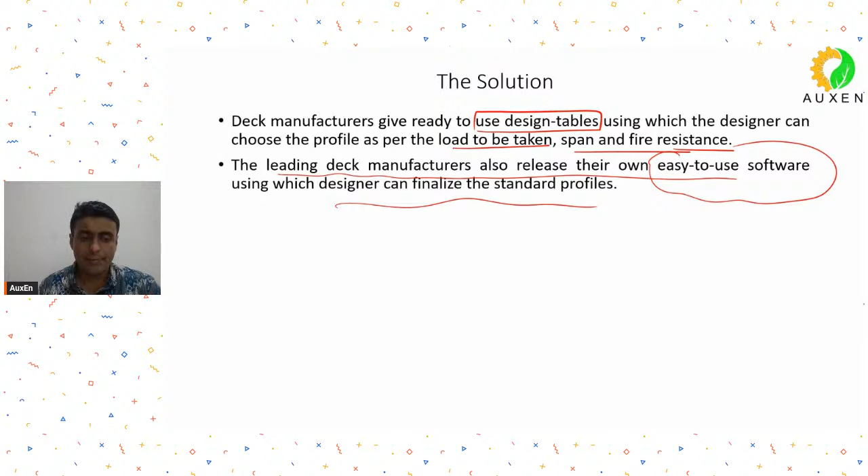Let me share my screen, and what I will do is I'll share a table. Mr. PD Vlog has referred some tables.

Where is the table? Wait, let me just... yeah, this is the table. So I'll be taking one manufacturer. Just wait a minute.

Mr. Sandeep is saying that he learned while doing one of the courses. Mr. PD Vlog has used it before. Very good.

Just a minute. Somehow I'm not able to see this... this is, yeah.

So this is a table, a manual that is released by Tata ComFlor. Tata in the United Kingdom bought out this company ComFlor. ComFlor was a market leader in deck sheet manufacturing, and now this is marketed as Tata ComFlor. In India they have Tata BlueScope, so in India, deck sheets are manufactured under the name of Tata BlueScope.

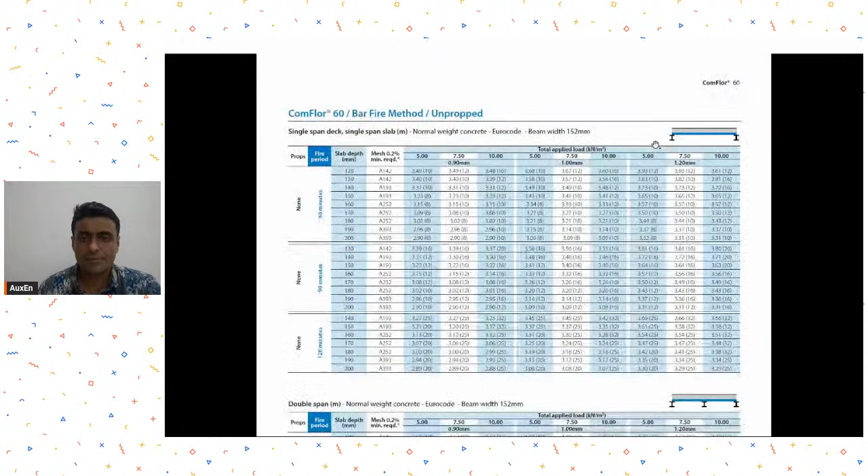We will refer this, and let's say right now we will take this continuous spanning. Wait a minute, there's this problem... I'm not able to write over here. Is this the way to write? Anyway, so this is the sample given to you. It's a double continuous slab deck sheet arrangement.

This is the total load applied. It is a ComFlor 60 profile, standard profile. This is the fire resistance to be considered. This is the total slab depth, and then these are the thicknesses. Now, how to use this table?

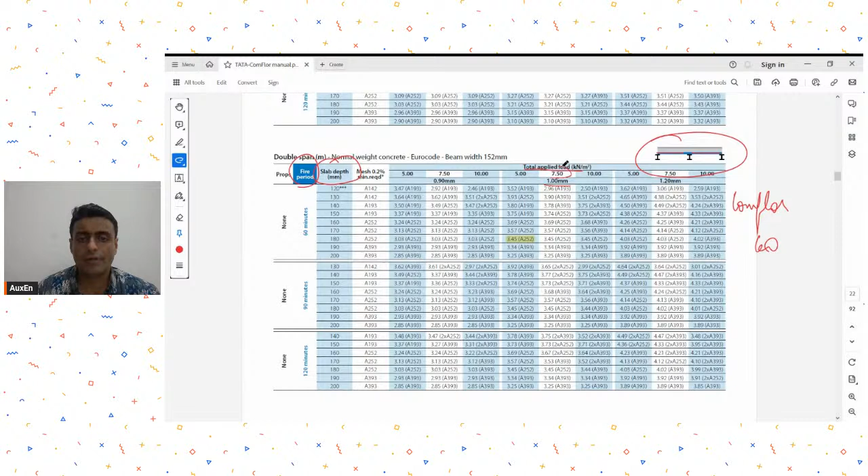Suppose the total load that you need to resist is, let's say, 7.5 kilonewton per meter square. This includes all the live load, all the dead load, everything. Suppose you are looking at a 130 total slab, that means 60 is the profile, and you will have a 130 total concrete, which will be 70 because 60 is the profile. So if you want to resist 7.5 kilonewton per square meter, you will have to provide a beam to beam span of 3.9 meters. Is it clear how to look at this table?

So these values given to you are the values for the secondary beam to beam span. Or suppose I wanted to resist 10 kilonewton per meter square total load, dead load plus live load plus finished loads, then I have to maintain 3.51 meters center to center span. Is it clear?

This value in the bracket is the value for the wire mesh or reinforcement you have to provide at top. This is the secondary reinforcement to arrest the shrinkage. This is the nomenclature given in the brackets.

Suppose it is a 1 mm thick deck sheet, ComFlor 60, and this will be okay to take a load of, let's say, 7.5 kilonewton per square meter if your secondary beams are placed 3.9 meters center to center. This is the way to use this table.

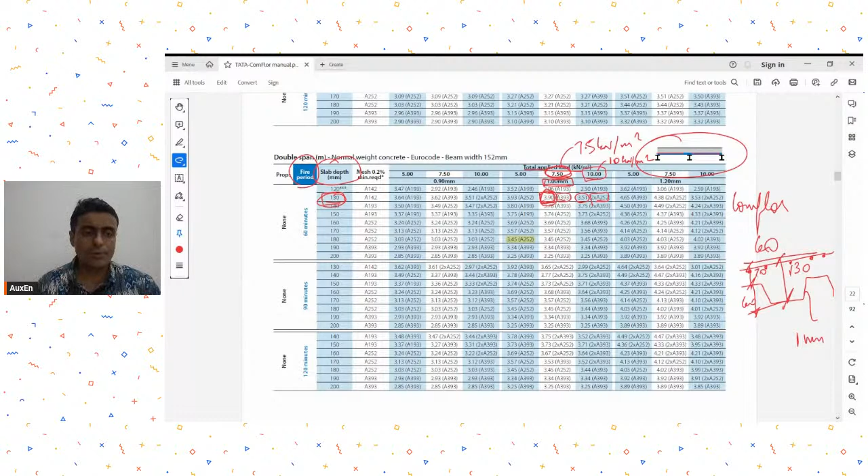So either you use this table because you are not able to do the design, or there are softwares given by the manufacturer. You can use those standard softwares given by the manufacturer.

PD blog is asking, is this loading excluding self weight or RCC load? No, no, it's inclusive of everything. It is inclusive of everything.

I'll show you a small software that these companies present, easily available on their websites. Can you see this? This is a software of the same manufacturer for which we were seeing that standard table. So it is the same company, Tata ComFlor. It is their own developed software.

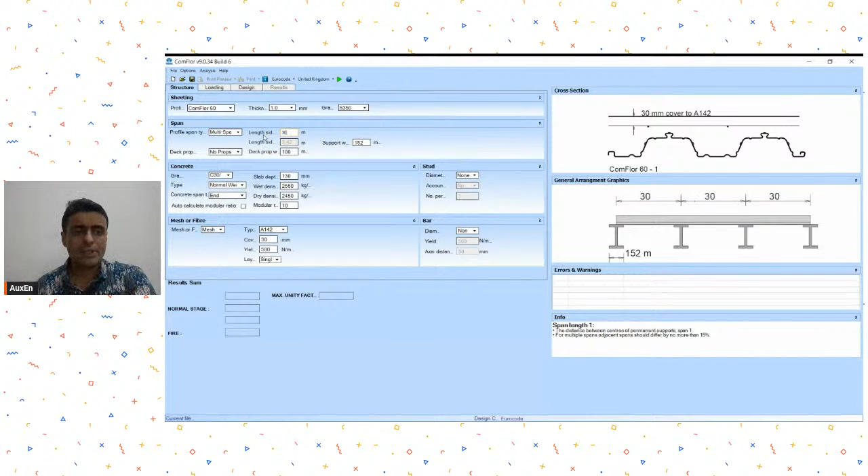The problem is you can only put their standard profiles, you cannot create any random profile that you want. You can only put their products, the thickness that they have. Grade is 350 grade. Whatever span arrangement is for you, you put whatever is the center to center beam spans, you put the concrete grade, everything you have to put over here.

Density of concrete, let's say it is 2550. You put everything, then you go to loading. You have to define the loads, and then you click on design, and in this way the design happens, and then it tells you all these things.

Can you see? So right now what may be happening is that in the construction stage it is okay, 0.78 is the utilization ratio, 0.92 is the utilization ratio in the composite stage. In fire it is a problem, so this may not be able to resist the fire, so we may have to go back and change the reinforcement to enhance its fire resistance.

Do you get it? So if I change the reinforcement, now it becomes safe in fire also. Is this clear to everyone? So when I put more reinforcement, the fire resistance improved, and it got safe in fire also.

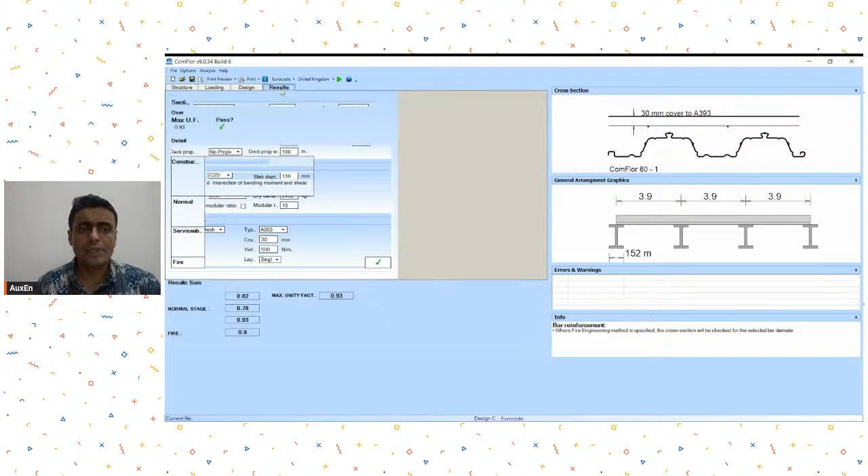So these are some small softwares that the leading deck sheet manufacturers have. Either you can use the tables, or you can use these softwares. These softwares are easily downloadable, you can download it from there, and these are all the checks. And if you want a detailed PDF, you can use this print button.

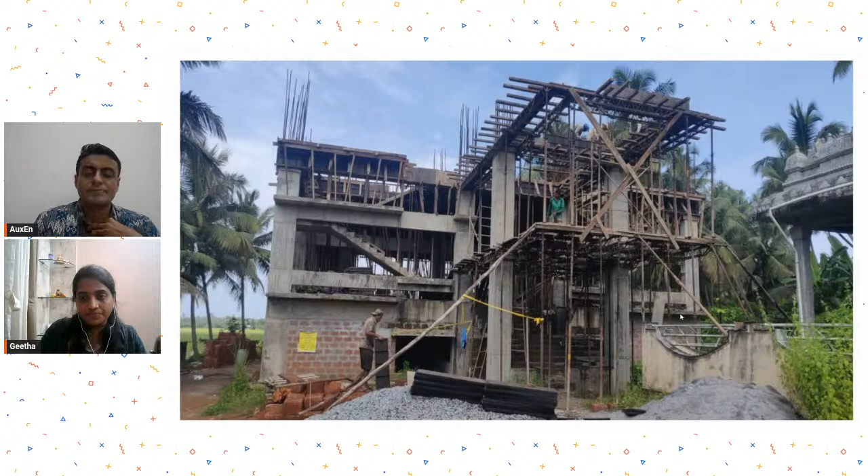This is a project that I freelanced. No, no, this is all from the office. For the freelance projects, I have a shortage of photos.

This is the apartment project that I was handling, now in the first floor level. All the drawings are ready, so it has gone to site and construction is in process. This is the freelance project that I've given, but it's still under plinth level construction. Car parking is coming, and after that the G plus 4 building. This is in Bangalore.

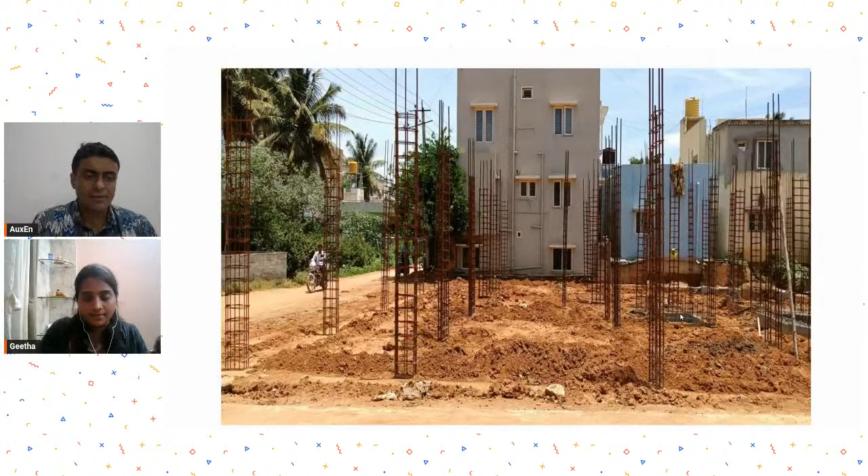All these projects were in and around Karnataka. The present projects that I'm doing at Aminbavi and Hegde have both RCC as well as steel structure exposure. This is my present company. I joined here at the end of December. Please tell a few things about the company first before proceeding, just a basic intro.

Aminbavi and Hegde is actually a Dharwad-based company. They have projects all over India and also in some parts of Africa. They do industrial sugar factory projects and water board type projects.

They have separate design teams assigned for RCC and other works. They also take government projects, and even educational institutional projects. They have exposure in all fields like residential, canal, industrial, educational buildings, and universities.

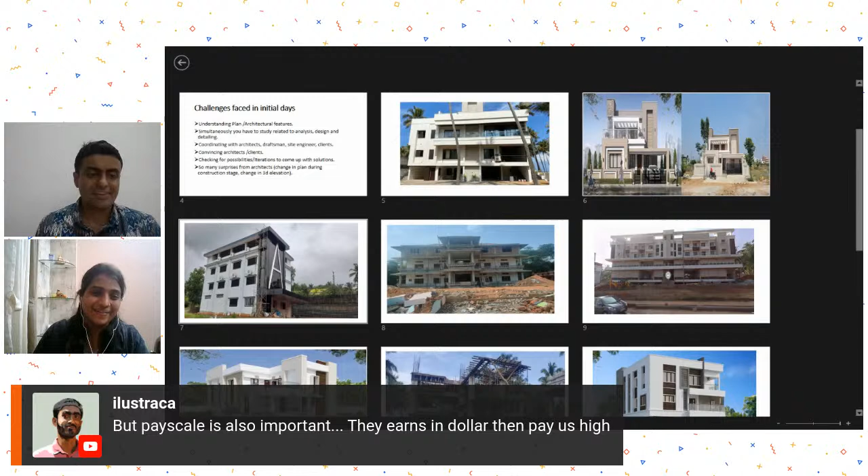Mr. Sandeep is saying pay scale is also important - they earn in dollars, so they pay us high. So he's saying large companies will pay you well. But it depends on you - if you want to depend on their salary, then it's okay.

So you are saying you like working in a slightly smaller or medium level consultancy firm, because that way you are also able to take ownership of the entire project, which is not possible in bigger companies. Yes, sir. And after like 5 years or so, you can join the MNC because you will have all the knowledge - even what these people are doing as well as what they are doing.

Okay, interesting. Anything else you want to tell us? So between working stress and limit state method, which one did you find leads to a more efficient and economical design?

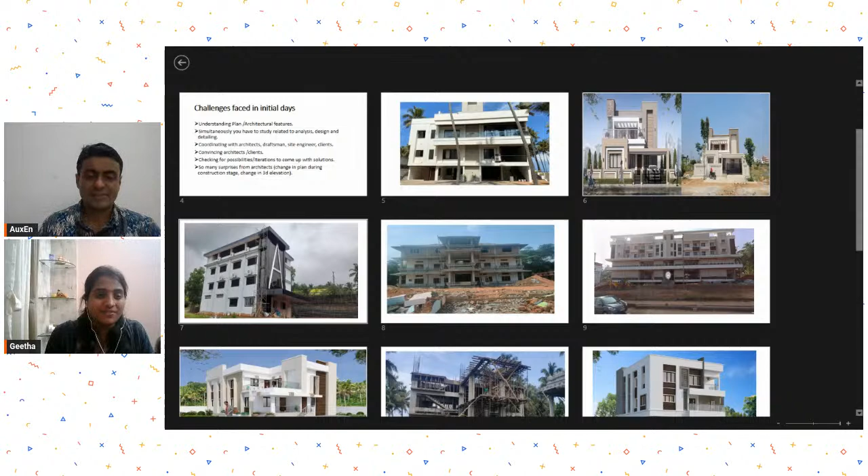Economical is the limit state design, even the weight comes very less. But if you are going for ISMB sections and all, the total weight, whatever steel tonnage we are getting, that will come high. But for industrial structures, since they go for higher safety, they will not go for local failures and such, so they restrict to the working stress method.

Working stress - okay, no risk. They don't want any risk or any case of local buckling failures or local compression failures. So they go for hot rolled sections.

And do you use tubular sections in your projects? What's that, tubular - hollow sections? No, till now I didn't use it, but they are doing it.